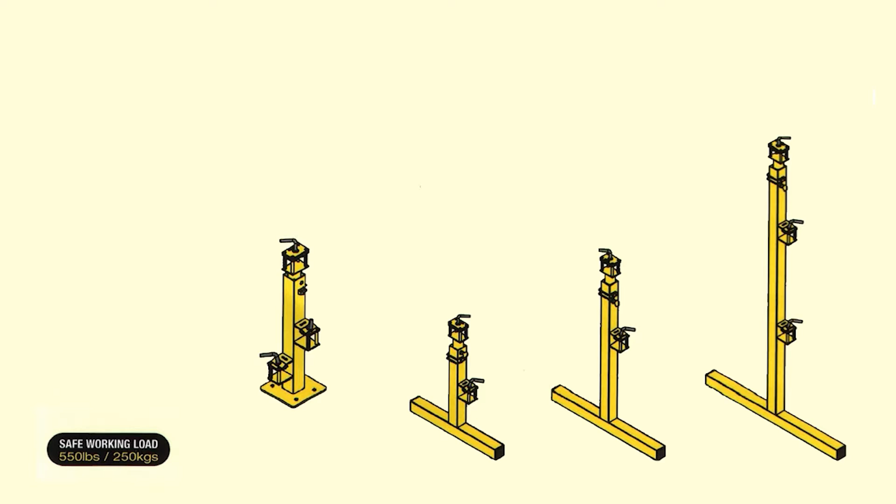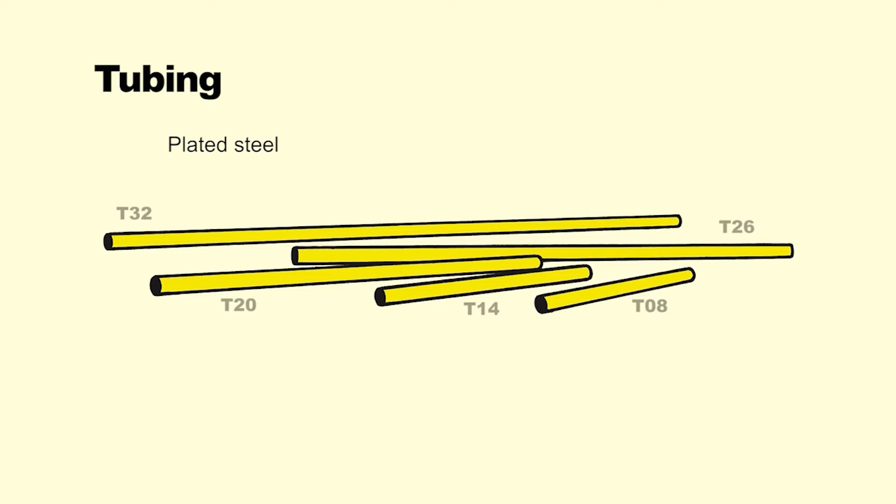The LOBO system is built on 3 different size trestle legs or adjustable base plates. Trestle legs, incorporating side clamps and top clamps, together with round steel tube and Loband couplers, form the basic elements of the system. The Loband coupler and all other LOBO clamps feature an L-bolt, which must always be tight. The 3 sizes of trestle legs and the adjustable base plate connect together to form a modular and scalable access platform system.

Remove the height adjustment pin and raise the insert of the LOBO trestle legs. Always remember to reinsert the pin and tighten the thumb screw. The welded side clamps are set at predefined positions and all line up to allow total integration of all LOBO Systems trestle legs, base plates, and round tube.

To build any structure by using a trestle leg or base plate, take a length of LOBO round tube and insert it into the lower side clamp and tighten. Always start at the lower side clamp. Take the second leg and repeat the procedure, ensuring you use the lower side clamp first to allow the round tube to square up to the leg. Wherever there are adjacent side clamps, add more round tube to form the next load-bearing level.

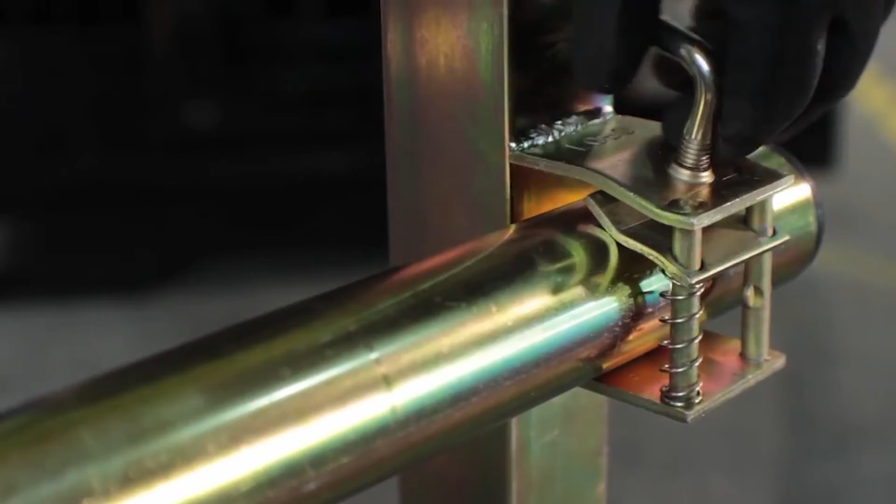It is possible to build a level platform on uneven surfaces, steps, or slopes by using the Loband coupler. There are a number of ways the LOBO system can be configured over a step or on a slope. For example, using the Loband coupler, which is not load-bearing, set the round tube height to provide a level round tube as shown. Fully tighten the Loband coupler and ensure the trestle legs are vertical. Never use the Loband for load-bearing purposes. In this case, only the round tube at the top could be load-bearing, as it will sit inside the top clamp.

LOBO Systems low boards are all rated at 660 pounds safe working load, uniformly distributed, and they come in a variety of lengths, widths, and top surfaces. A hatchway door option is also available. Here we repeat the initial assembly process and use more trestle legs to produce a second trestle configuration. Any low board size can be used to suit the requirement.

The low board, when fitted in place, should be locked in position by a small piece of round tube called a T01 and a Loband coupler. Ensure the Loband is tight and the L-bolt is positioned on top of the low board to stop it from lifting up. Low boards can be configured side by side, end to end, or at right angles. Low boards are designed to fit end to end, enabling a raised walkway or ramp to be constructed. As they interlock, low boards cannot be lifted individually.

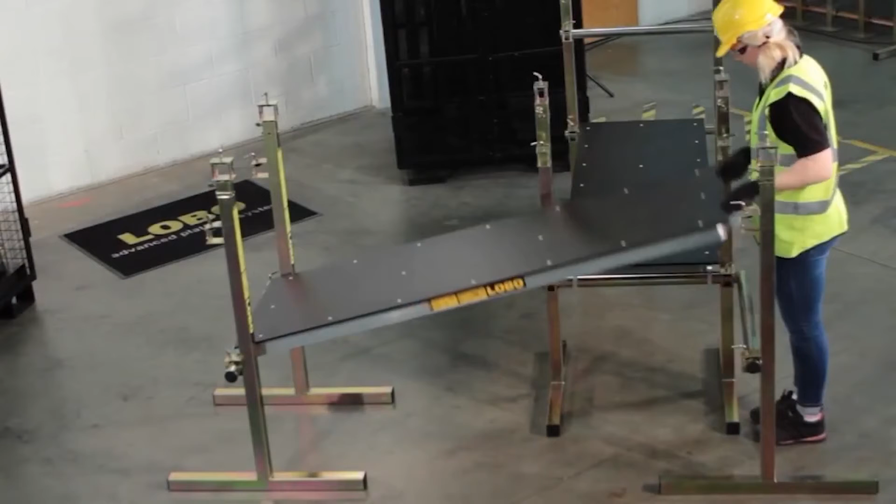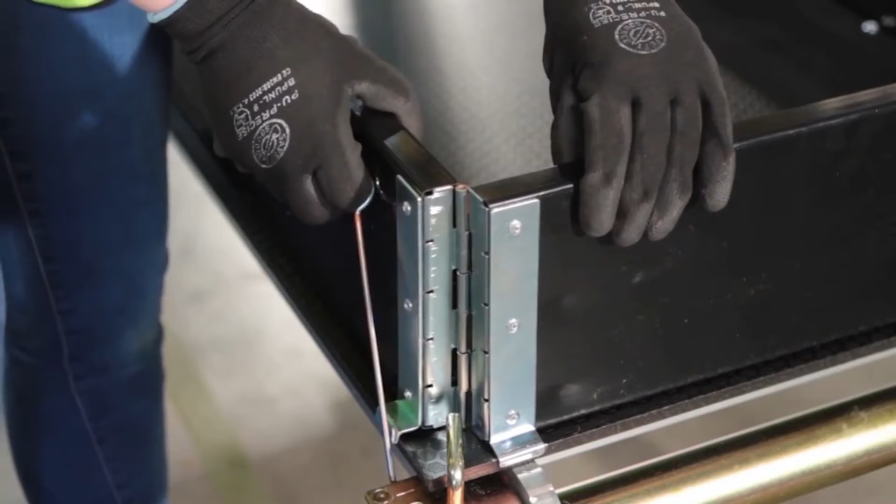Toe boards. There are two types of toe boards. Individual toe board pieces, which are fitted with toe board clips and joiners to form corners, and hinged, which wrap around the edge of the low board. These are fitted by opening them out over the low board perimeter. They can be fixed down with a Loband coupler and small round tube if required.

Handrail round tubes. Round tubes should be fitted at every standing height using Loband couplers to form handrails. Tubes should, wherever possible, be fitted on top of the load-bearing tube and secured with Loband couplers. This means the tube can then be load-bearing. The tube can be positioned exactly where needed and the Lobands tightened to secure in place.

Adjustable extensions. To increase the system height, remove the telescopic insert and insert an adjustable extension. This can then be raised to the required height. Reinsert the pin and tighten the thumb screw to remove any movement. Adjustable extensions can be fitted to any trestle leg or base plate by removing the inserts and reinserting it into the top of the adjustable extension.

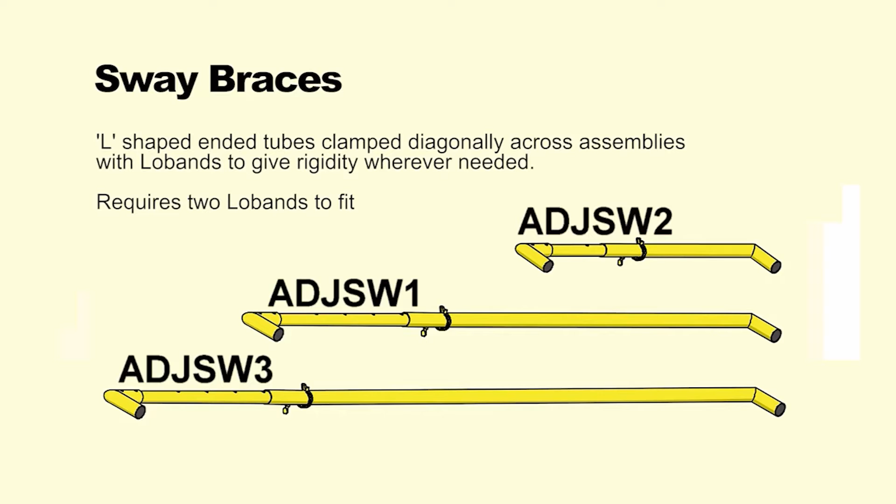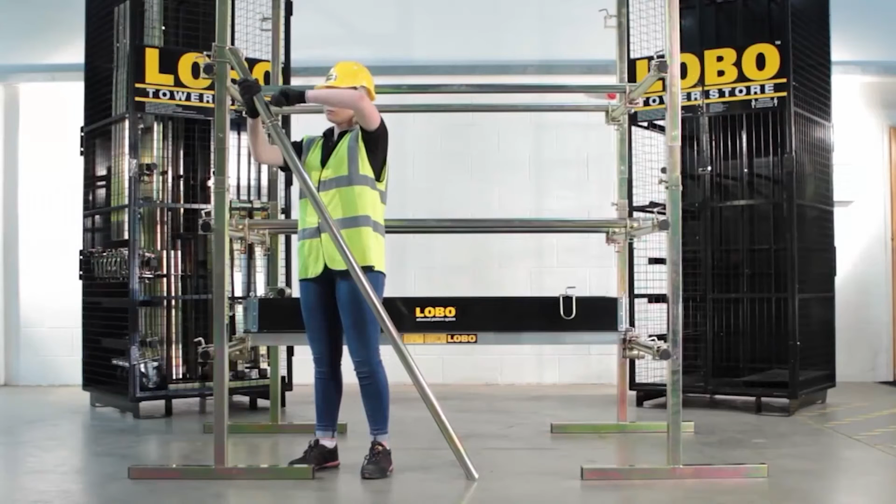Adjustable sway braces. There are 3 adjustable sway braces, which are telescopic and so can be fitted anywhere on the system to remove unwanted movement. Adjustable sway braces form diagonal bracing across any LOBO platform and can be fitted to round or square tube.

Select the correct length from a choice of 3, depending on the size of low board in use, and adjust the telescopic sway brace length to fit. Reinsert the pin and tighten the thumb screw to lock in place. Use Loband couplers to secure the sway brace. The sway brace can be moved to the optimum position.

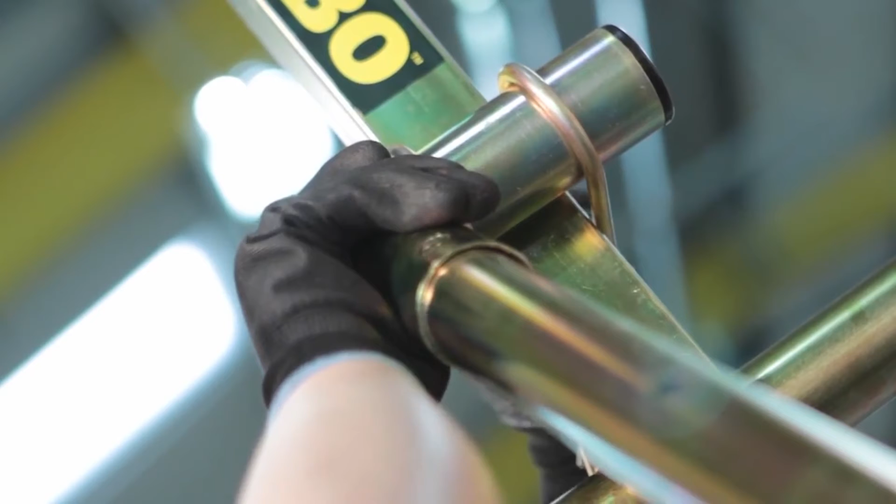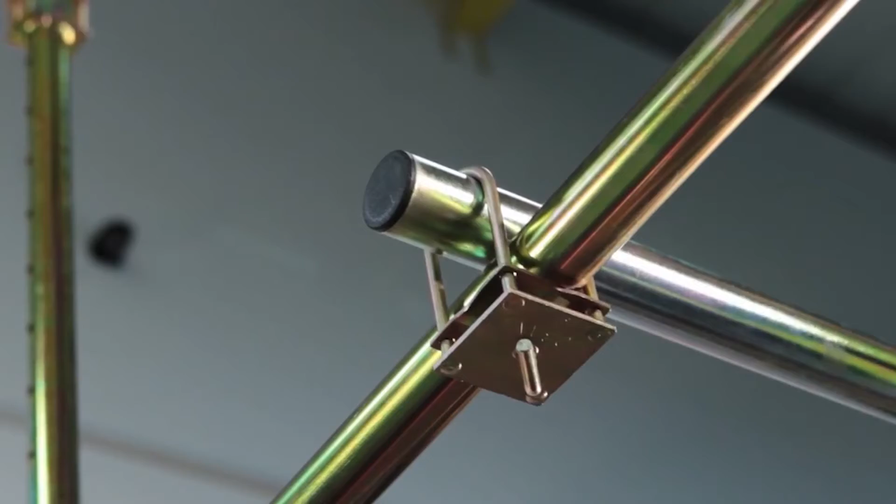Handrails can be fitted above the current working height to ensure safety when an elevated height is being constructed. The advanced handrail construction process provides additional protection when the new height is reached. Always ensure the low band L-bolt is tight and position tube on top of a load-bearing tube whenever possible.

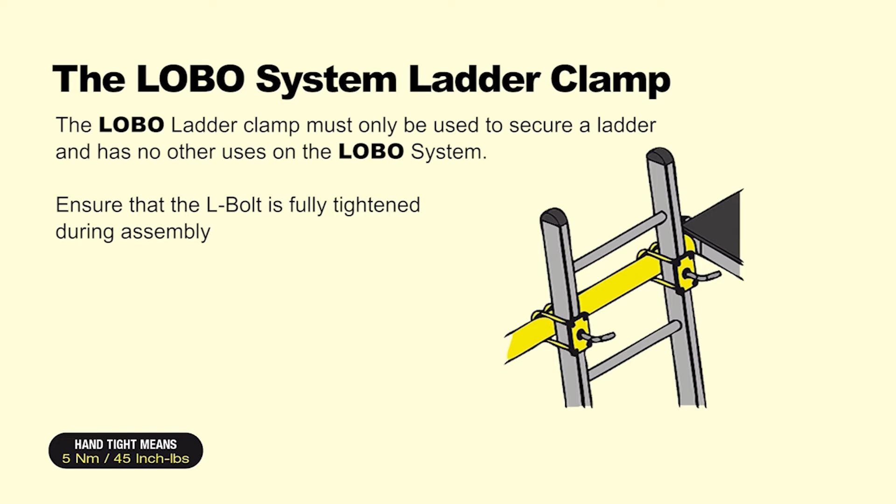Ladders. Ladders can be secured to round tube anywhere on the system using LOBO ladder clamps. Always use at least 2 and ensure the L-bolts are tight.

LOBO Advanced Handrail System. The LOBO system allows handrails to be fitted above working height from a lower position of safety so that the trained user should never be exposed to the risk of a fall. To construct the next level, insert extensions and round tube accordingly.

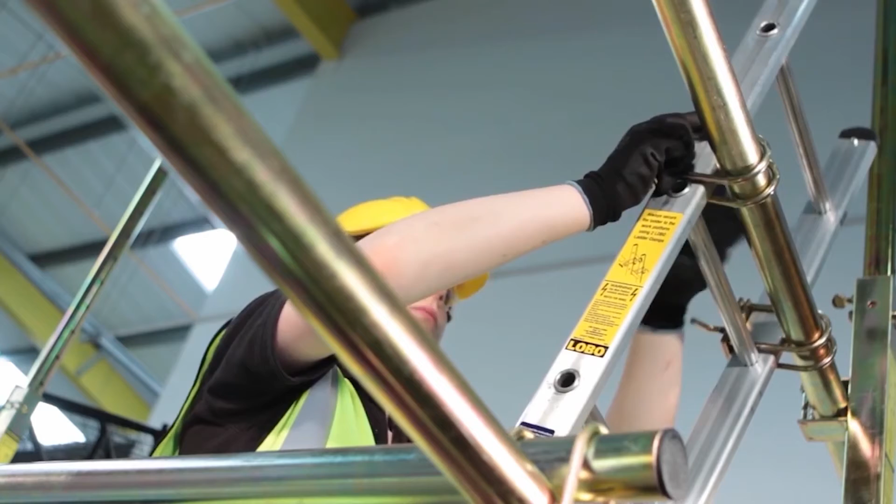Ladders come in a variety of lengths and can be fitted from a position of safety using 2 LOBO ladder clamps at the top of the ladder. If the ladder needs to be vertical, 2 more clamps can be used to secure the bottom. Always ensure the ladder clamps and side clamps are tight and secure.

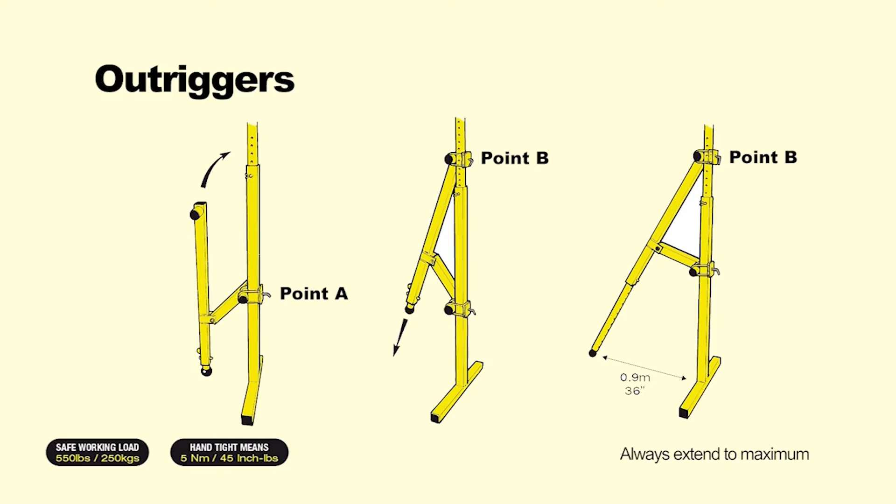Outriggers are used to increase the platform footprint of a structure, thus ensuring it always complies with the 3:1 height to base ratio rule. Outriggers should always be used to provide stability to taller systems and should be fitted all around a structure. 2 low bands are required to fit each outrigger.

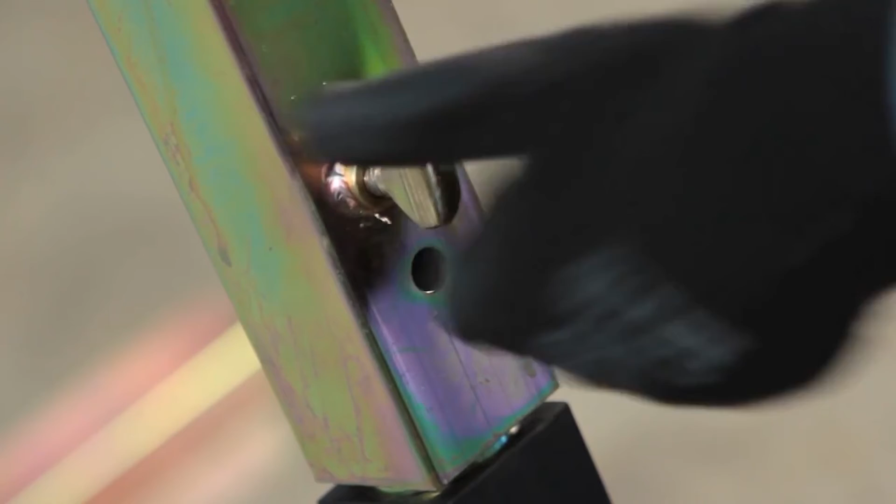To fit the outrigger, secure the bottom of the outrigger to the leg using a low band. Secure the top to the leg with another low band. Remove the pin to drop the outrigger rubber foot to the floor and reinsert the pin and tighten the thumb screw. Loosen the low bands to adjust down to the floor, then tighten to secure.

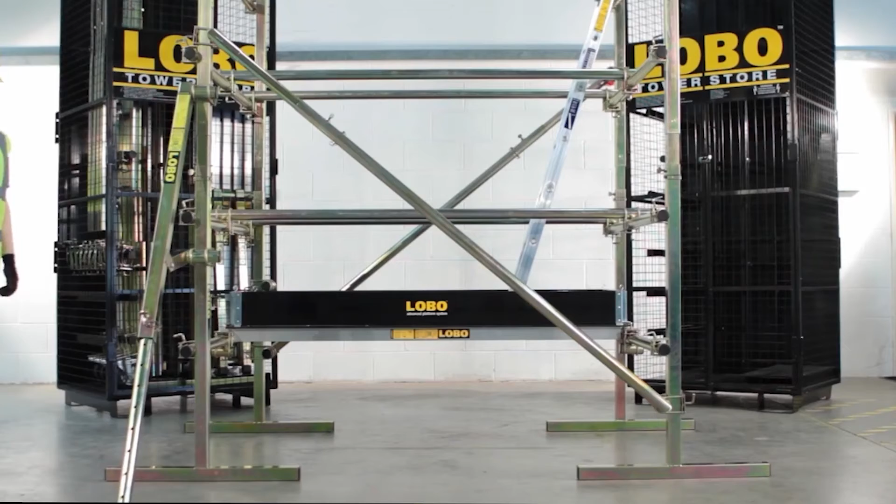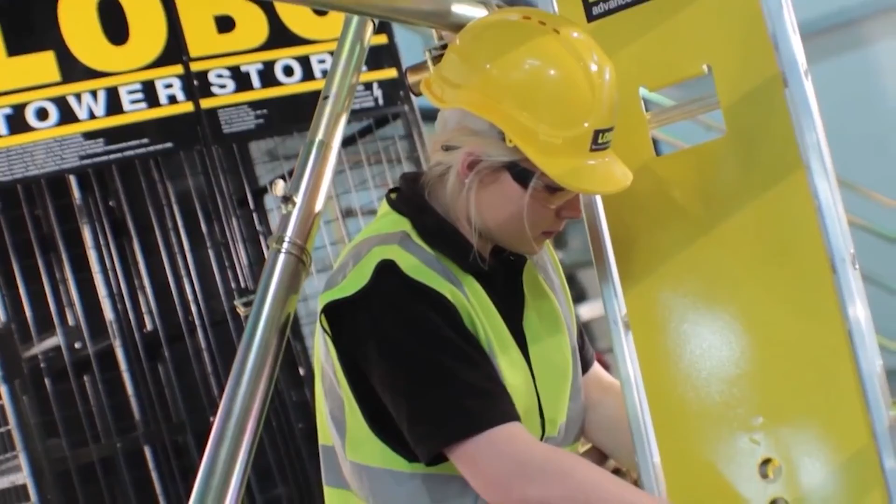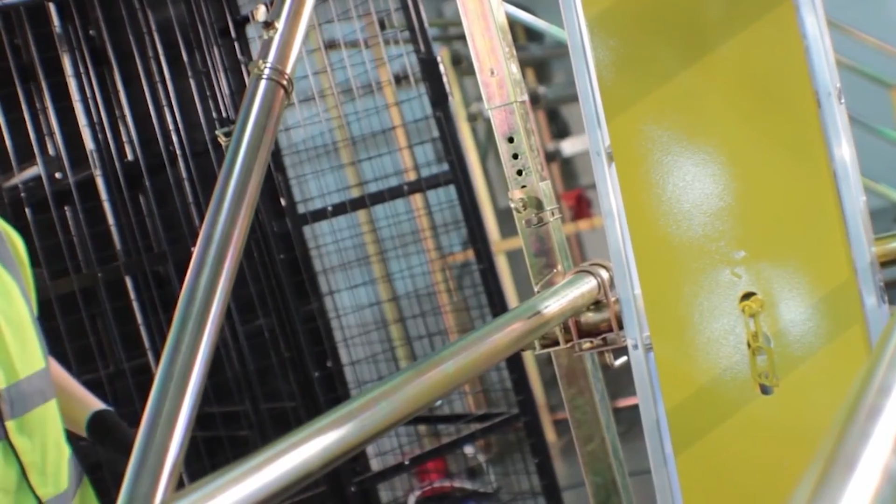Ladder guards. The LOBO ladder guard comes complete with a padlock and is secured from behind using the chain. When using LOBO boards with hatchways, require the ladder to be on the outside of the tube. Cross tubing should then be fitted using low bands to complete the handrail enclosure around the LOBO board from a position of safety. LOBO boards can be fitted to the next level and adjustable extensions form handrail verticals.

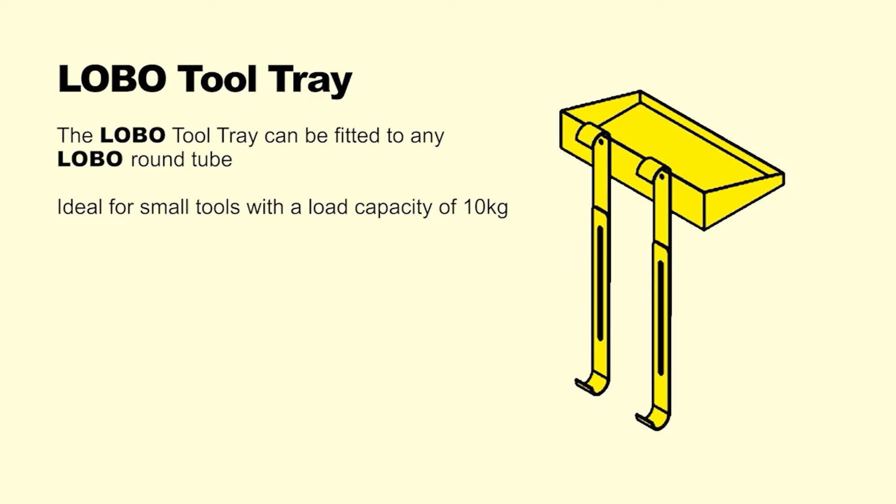Tool tray. The LOBO tool tray can be fitted anywhere on round tube to provide a convenient shelf when working on the platform. The brackets are designed to adjust to ensure a secure fit.

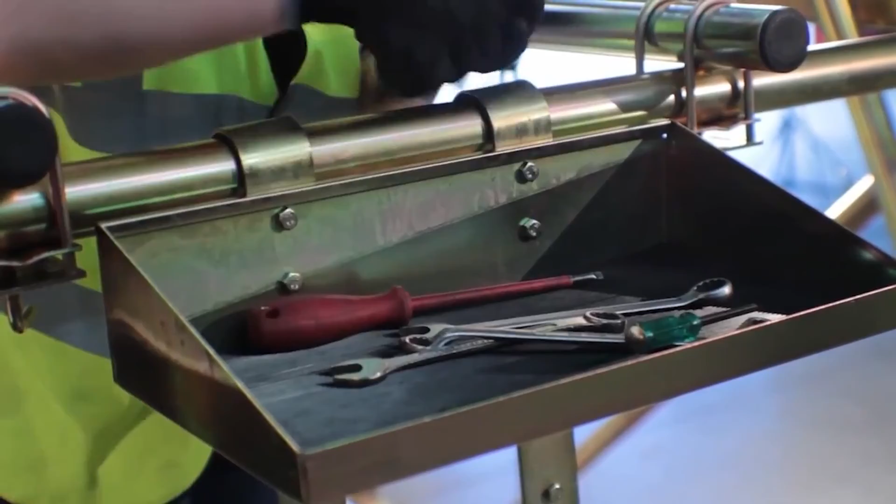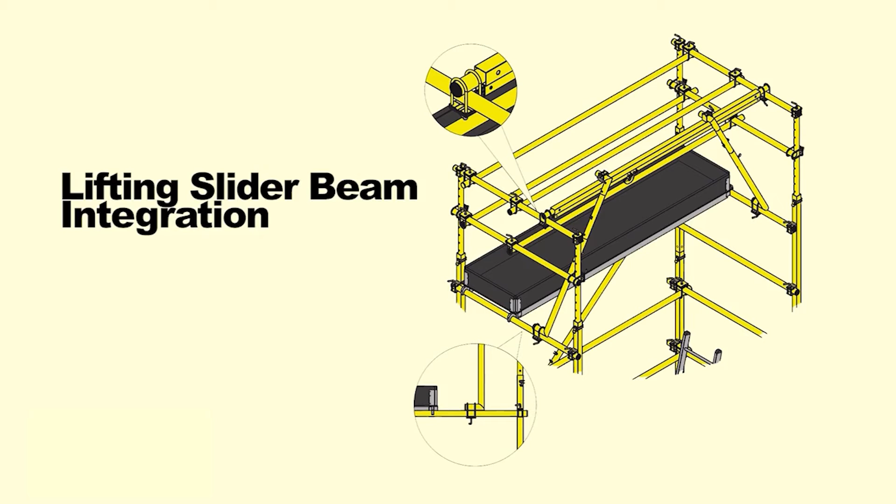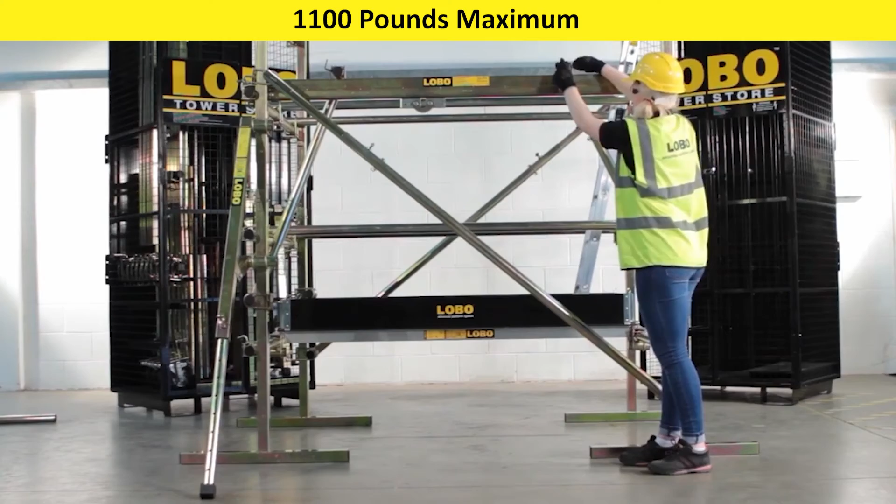Lifting slider beam. The LOBO System's lifting frame can be assembled using any size of LOBO trestle legs and adjustable sway braces. The lifting slider beam can be rated at 1,100 pounds and is certified accordingly. LOBO beams can be integrated into the LOBO system. There are 5 different lengths to correspond with 5 LOBO board lengths.

Insert the lifting slider beam into the top clamps and raise to the required height. Use the adjustable sway braces, fitted using LOBO bands, to ensure the system is rigid. Outriggers and extensions can also be used to stabilize and increase the lifting height of the frame. Load calculations and stability assessments must be performed each time the beam is used to ensure overloading and instability does not occur.

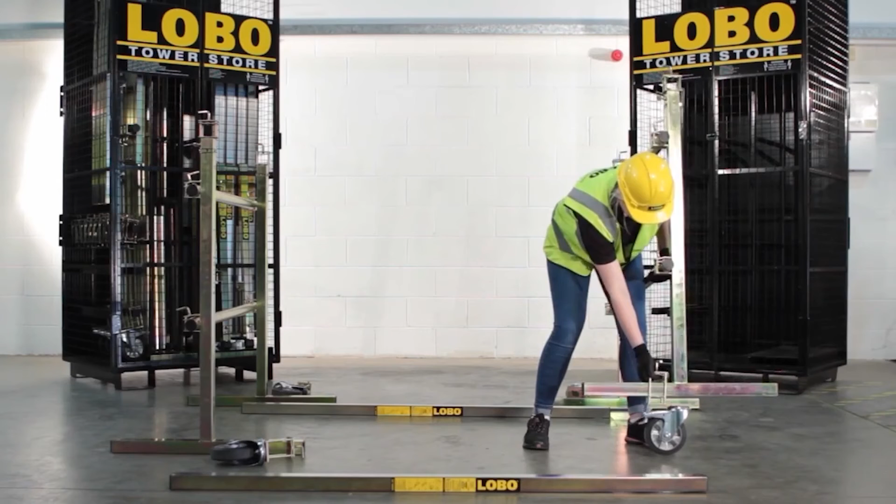Wheel kits. Wheel kits are available for systems on trestle legs and base plates and come in different sizes to correspond with the LOBO board length. Remove the wheel from the wheel kit and, by lifting the trestle leg, insert it onto the foot of the trestle. Repeat to place an additional wheel on the same side on the opposite trestle.

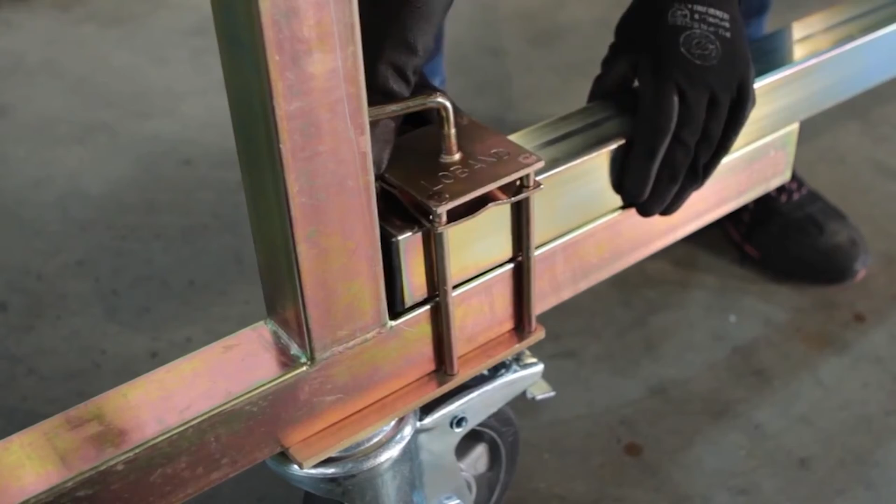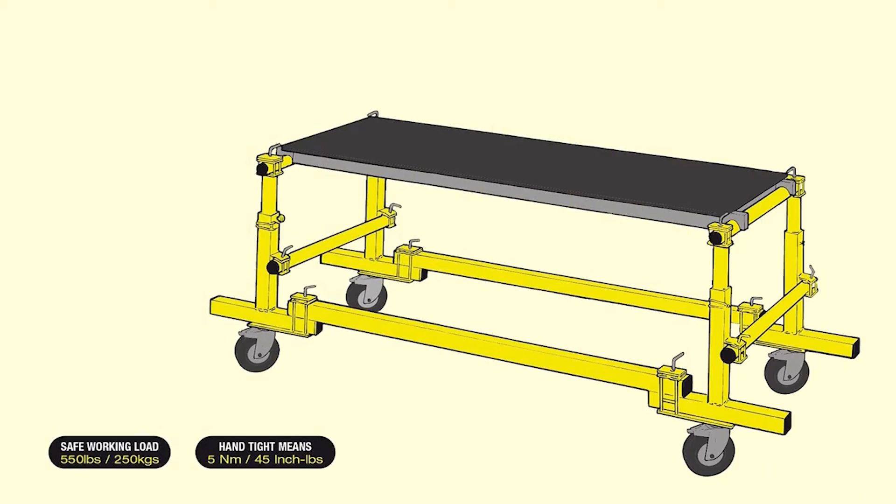Take the connecting square tube and insert it into one of the wheel top clamps to secure the wheel in place. Tighten the L-bolt. Repeat on the trestle on the same side and then repeat the procedure for the 2 legs on the other side. Fully tighten all L-bolts once the LOBO board has been refitted, and always ensure the brakes are fully applied before using the system. If the system has been built square and straight, the LOBO board should slide easily across the round tubes.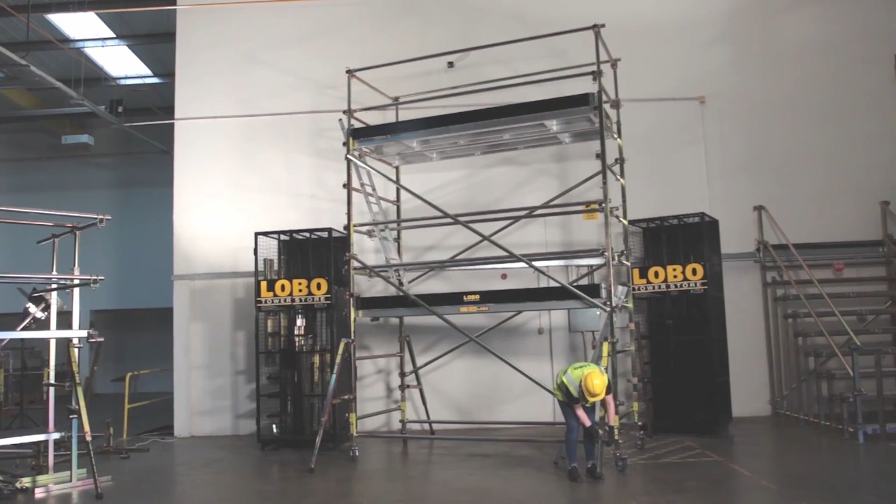The information provided in this short film illustrates the basic principles of how to assemble the LOBO system and identifies some of its more popular components. The configurations that can be built and the potential of the system is limited only by the imagination. For your own safety, please always remember the following points. 1. Anyone building or using the LOBO system should undertake the LOBO course and be trained and certified by an authorized LOBO trainer.

2. Always read the instructions before assembling and using the LOBO system, and consult the system catalog if necessary. 3. Always ensure the system is safe and secure before using it. 4. Always ensure that all clamps are fully tightened and secure before use. 5. Pack away all component parts properly after use.